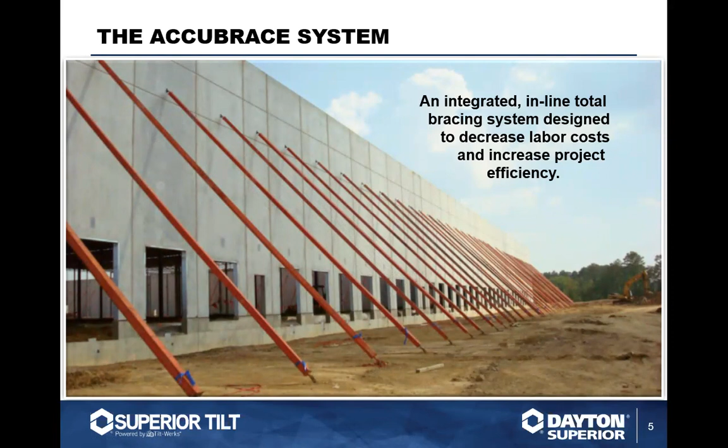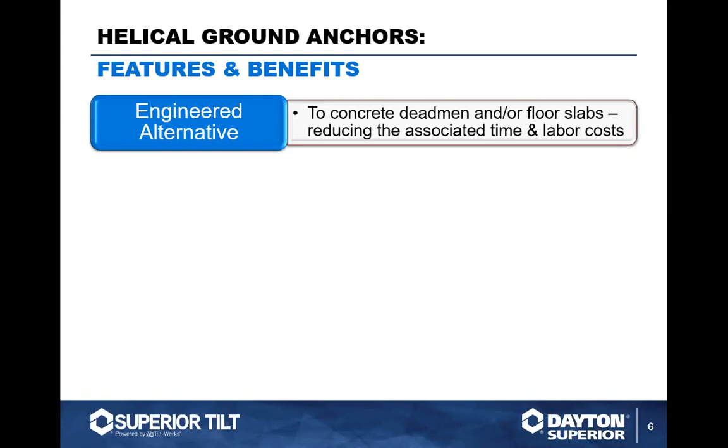Accubrace is an integrated inline total bracing system designed to decrease labor costs and increase project efficiency. Some of the features and benefits of the Accubrace system: it's an engineered alternative to concrete deadmen. If the project is not going to have the slab available to brace to, and you're going to have to use concrete deadmen or strip footers, the HGAs can be used as an alternative to that. And this can reduce costs through eliminating the extra concrete needed for the deadmen or strip footer, and also the labor that goes into that.

It is a rapid all-weather brace installation system. Once the HGA is installed, it can receive immediate loading. There are no pull tests associated with HGAs.

As the installer is installing the HGA, they'll monitor pressure to make sure we receive the adequate torque that is needed for the braces. The only thing weather-wise that could put a damper on HGA installation is up in the north with the heavy frost in the winter. We have run into issues with there being too much frost in the ground for the HGAs.

We are able to remove and relocate the HGAs on site. We all know that projects usually come with revisions. With the HGA system, if you need to move it, you can take it out and reinstall, unlike dead men where you have the concrete in the ground that is there once it's there.

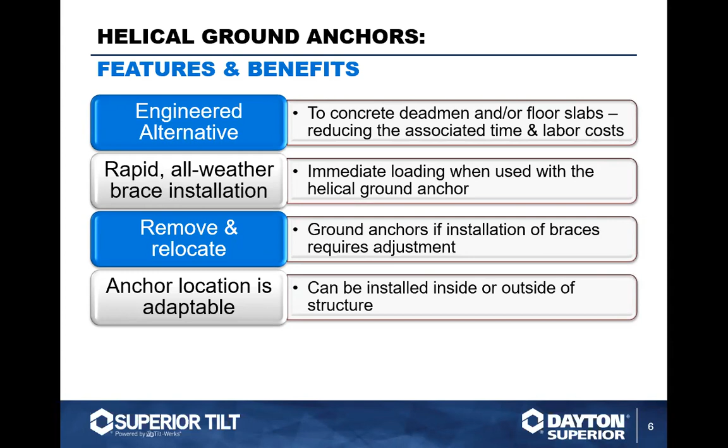The anchor location is also adaptable. These can be installed inside or outside of the structure. We actually have a lot of projects where the whole project might go to the slab for braces, but there's a corner where the slab won't be available. So they'll have us come and install HGAs in place of that.

Also, when you can brace outside to HGAs, it allows the steel erection to go a little smoother, opens things up for those guys, gives them room to work, and the steel won't be impeding on the braces.

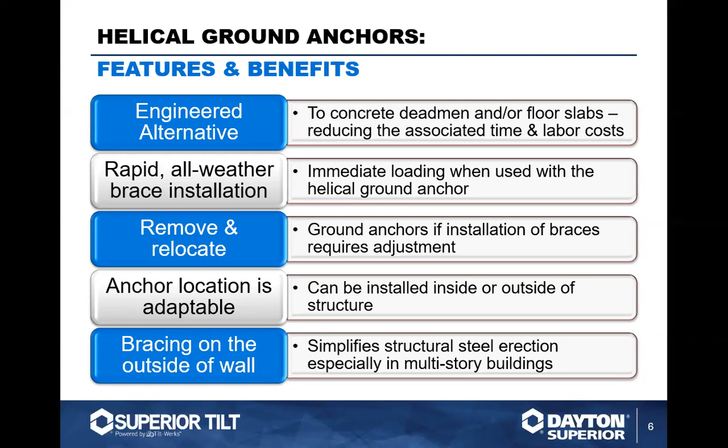Some more features and benefits. We do have the professional engineering team at Dayton, and if the project is in engineering with Dayton Superior, we have it available. We can do the HGA layout right in the engineering package. This will give you an X dimension where the HGA will be located, and the contractor can do the layout for the install.

They're removable and reusable. Once the roof structure is in and the engineer of record signs off on the braces being able to be removed, we'll come out and remove the HGAs. And basically when you're removing them, they refill the hole they created on their own, so there's no cleanup.

The HGA can be used with any type of brace as long as the STBC can be attached to it. It's a 1.5 inch square bar that the STBC accepts, and that is where our HGAs are. In some instances, HGAs can reduce the number of braces needed if they're used with our Accubrace square high capacity braces.

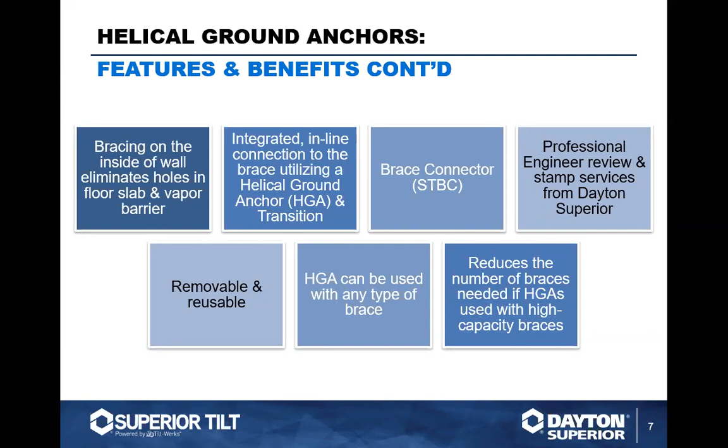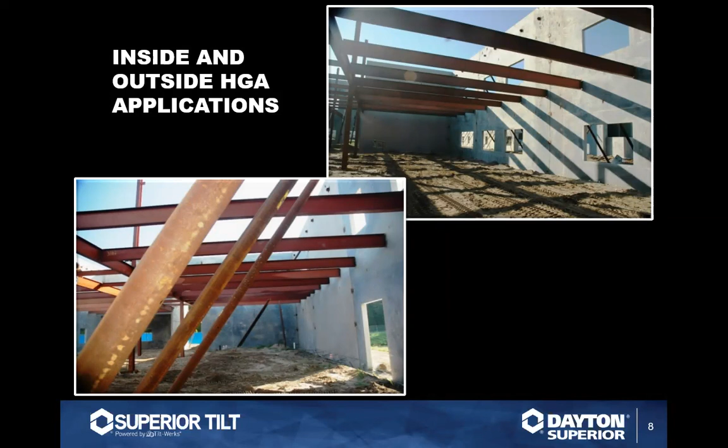So I have a couple examples here of inside and out. You can see in the top right, we were able to do HGAs outside the building to leave room nice and clean for the steel guys to work on their part. And then also we can do inside, as you can see in the bottom picture.

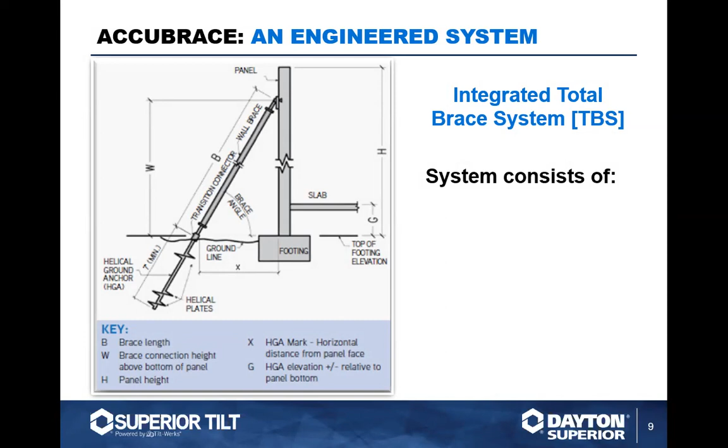We have a diagram of what the Accubrace system looks like. You have your wall brace, your connection, and your HGA. The standard transition brace connector is what's going to be your connection between your HGA and your brace. And you can also see the X dimension is the horizontal distance from the panel face. That's where your contractor is going to mark out the spot for the install.

Typically, the HGA has to match the brace angle within plus or minus 5 degrees. So once that HGA is installed, typically it's around 5 feet in the ground.

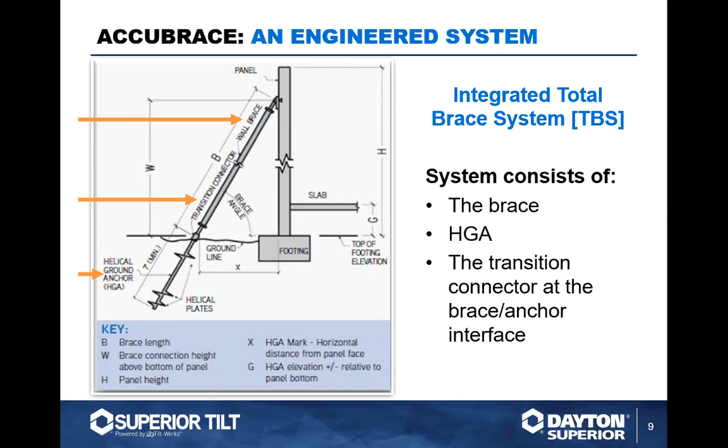As always, if you know you're going to have a project that's going to require HGAs, let us know and get us the soils report, the geotech report. We have engineers that will take a look at that, and they'll take a look at the blow counts and let you know that HGAs would be suitable for that project.

Obviously, the HGAs cannot be installed through solid rock or very dense, highly compacted clay. So we'll take a look at that on the front end and just make sure that HGAs will be suitable and that we believe will reach the appropriate pressure.

The HGA layout and design can be PE stamped by our engineers also.

We're going to take a look at the Accubrace components. You have your helical ground anchor on the left, which is your standard HGA. That has a safe working load of 12,000 pounds. And then you also have an HGA extension.

This would be used if, say, you install the standard HGA and we don't achieve the minimum pressure needed. We can add another 4 feet. It bolts to the top of the standard HGA, and we can install 4 more feet to try to achieve that pressure.

In my experience installing, and I'm sure Brad would say the same thing, typically we don't need to use these. We can typically achieve the needed pressure with just the standard HGA. I can count maybe on one hand the amount of jobs we've needed them.

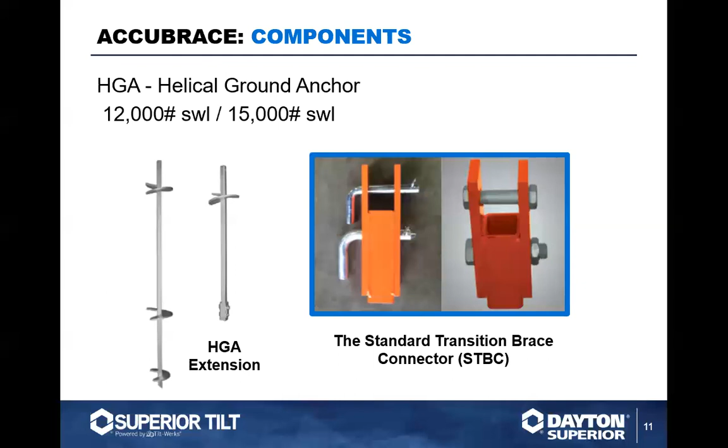And on the right, you have your standard transition brace connector. This is going to be your connection between the HGA and the brace once the HGA is installed. We typically ship them out with 3/4 and 5/8 grade 8 L pins, but upon request, we can provide bolts. We've had some contractors that just get a little bit better feeling having bolts instead of pins. So that is an option.

If you're on a job site and see an HGA that is not all the way in the ground, with more than 6 inches sticking up, that is incorrectly installed. That top flight needs to be completely in the ground for horizontal stability.

We have the transition brace connector again. As you can see, it is an inline system. The HGA needs to match the brace angle on the panel book. You do have 5 degrees plus or minus leeway, but it needs to be installed at that angle to achieve the inline system. There's a couple of different examples of different STBCs there.

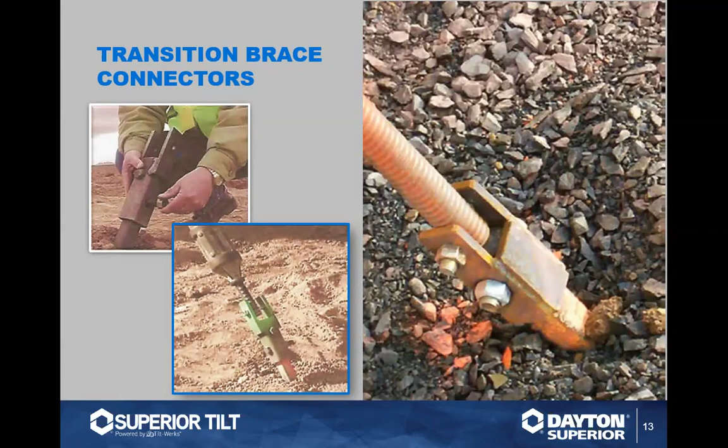Installation. Typically, if you have a project that is going to require HGAs and you are also renting the braces from us, when we put the order in, we will let the warehouse know that this is going to HGAs, and we will already have the STBC installed on the brace so that you don't have to take the wall plate off on site and connect it, because the wall plate to HGA connection is not an approved Dayton Superior connection.

As I stated earlier, the STBC will attach to the brace using the 5/8 grade 8 L pin with locking cotter pin, and the connection to the HGA will be a 3/4 inch grade 8 L pin with a locking cotter pin.

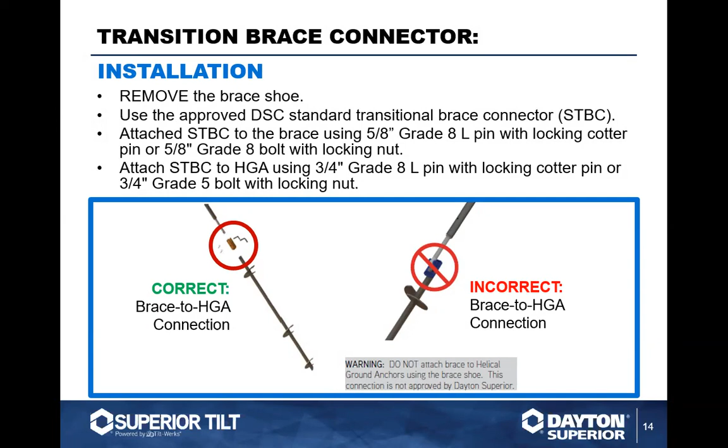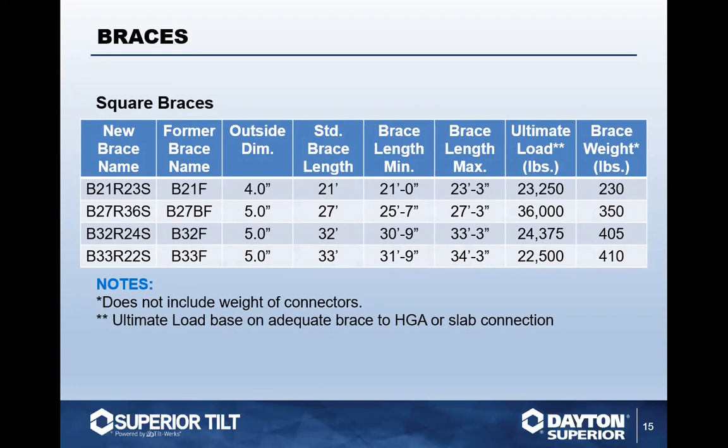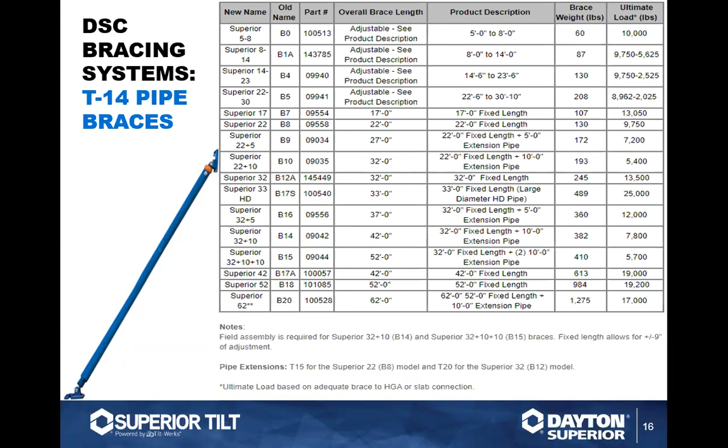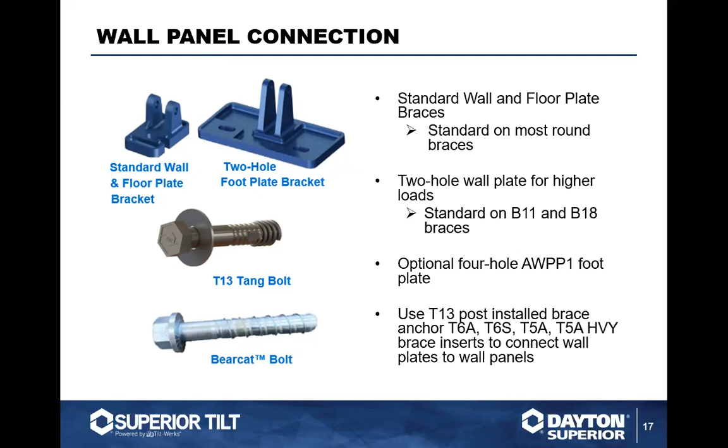We also carry our T5A heavy and T6A wall brace inserts. They come with a locator plug. We also have the inverted for outside bracing. And these are, like I said, they come with a locator plug, and they can be used with our B14 coil bolt to hook the brace to the wall.

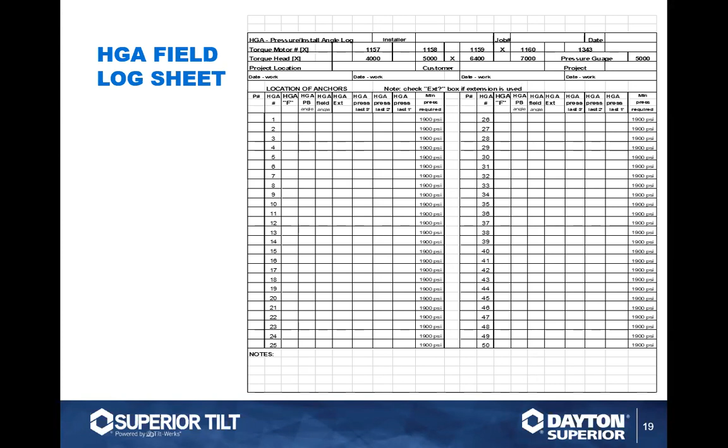So a lot of times with the braces that we have, we already know what our minimum PSI is going to be for each anchor going into each job. Sometimes we do have to reach out to an engineer for special projects, if you will. So these can be obtained anytime you have a job. You could reach out to our Superior Tilt or to me to obtain a copy of our pressure sheets. We're starting to get a lot more requests for that. All right, Heidi, if we could switch.

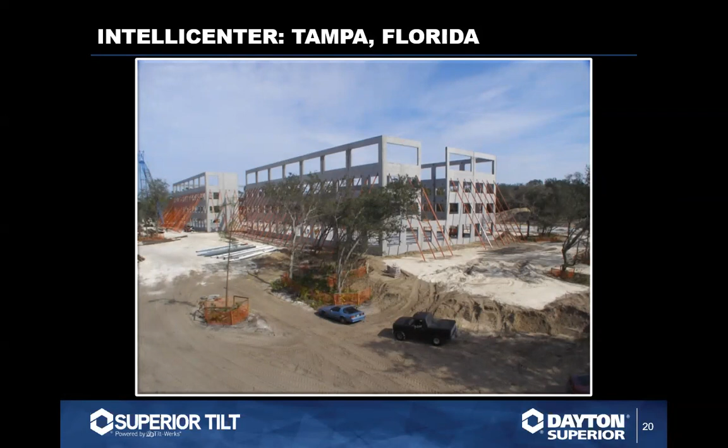So I'm going to be running through this kind of quick. We just have some photos and different things I want to explain. This was Intellicenter in Tampa, Florida. We did it a few years ago. As you can see in this picture, these are very tall panels. We used our square braces that have the high capacity, and that's where these braces would come into effect. Go ahead, Heidi, switch to the next one.

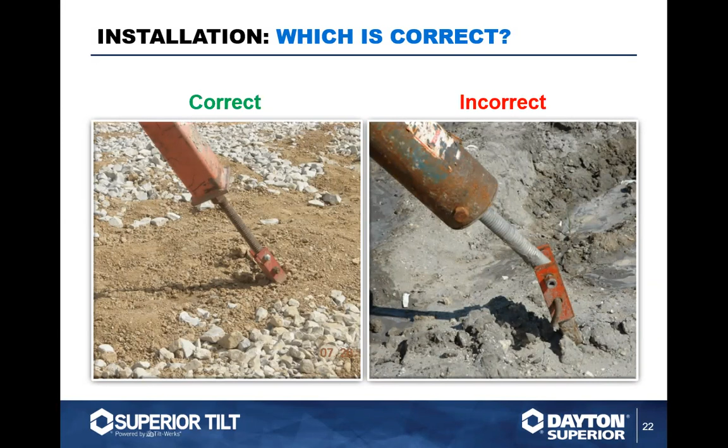So obviously we want to make sure that that load is in line through the whole brace, through the anchor, into the ground, where the HGA has that cone of influence for pressure. We can go with the next slide, Heidi.

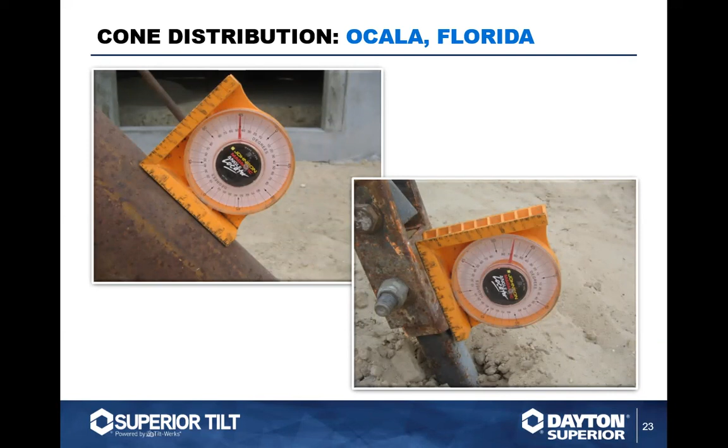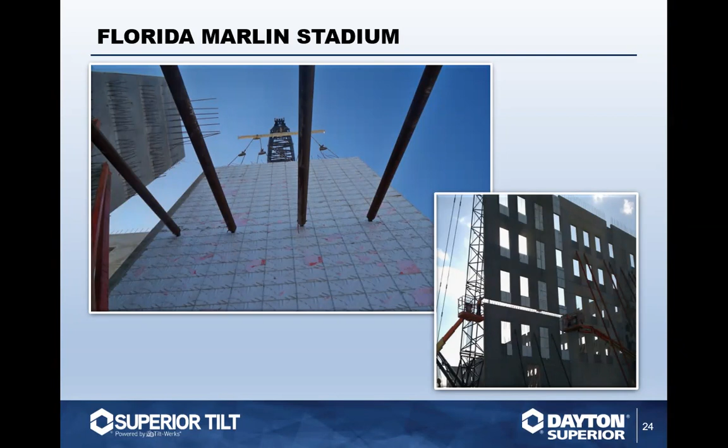Go ahead, Heidi. This was a big project for us a few years back, Florida Marlins Stadium. This just goes to show, like your picture on the right there, they're double stacking panels. So on the picture on the right, you could see where we've used shorter braces to brace that first panel, the bottom panel, and then you could see where we use maybe the taller square brace to brace that top panel. This was a pretty unique project for us.

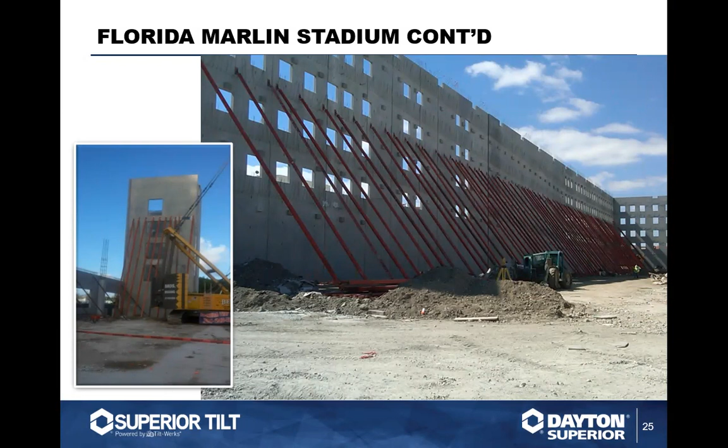Huh? Yeah. Let's go to California next. Yep.

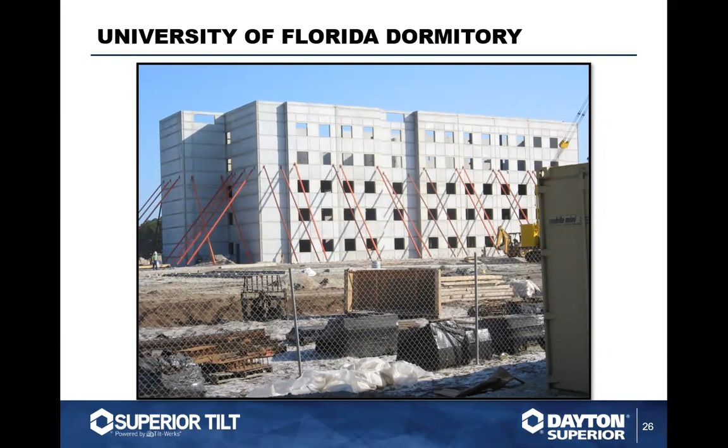Yeah, I mean, 1, 2, 3, 4, 5. It's a 5-story building basically. So just wanted to show our high capacity braces with the very tall panels. And as we go further into construction, the industry, we're learning that a lot of contractors, they're in tight spaces, so they want to go higher, not wider. So that's what developed our 62-foot brace with these data centers.

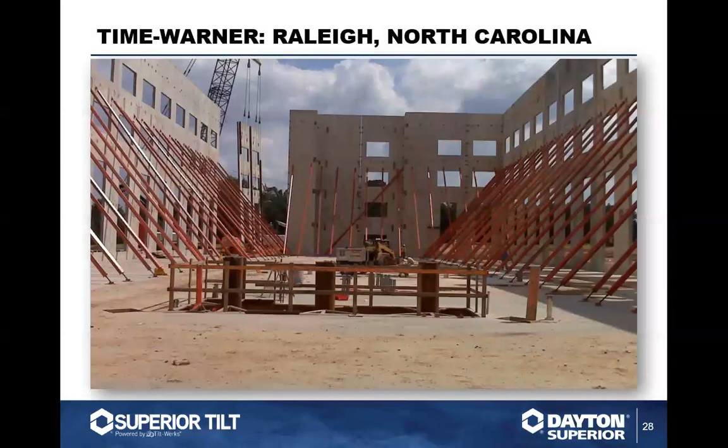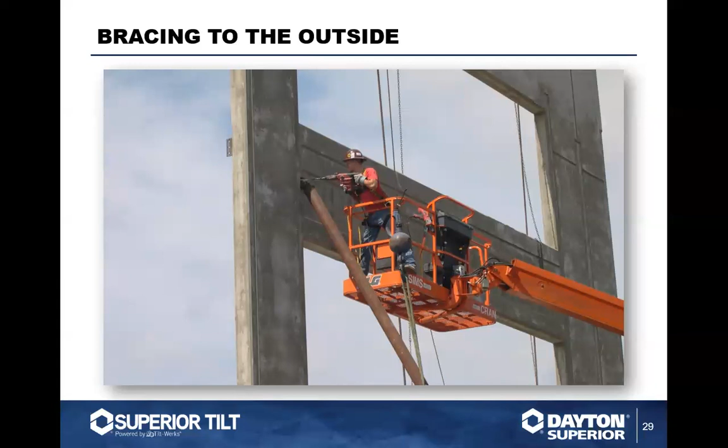All right, Heidi, I'll go to the next one. Here's just a picture of a guy. We're bracing to the outside here. So this looks like it's a solid panel, which is very universal for contractors. They don't have, say, a 3x6 or 2x4 solid insert they need to hit. They can kind of move that brace around a little bit to satisfy what they're doing. We'll go to the next one.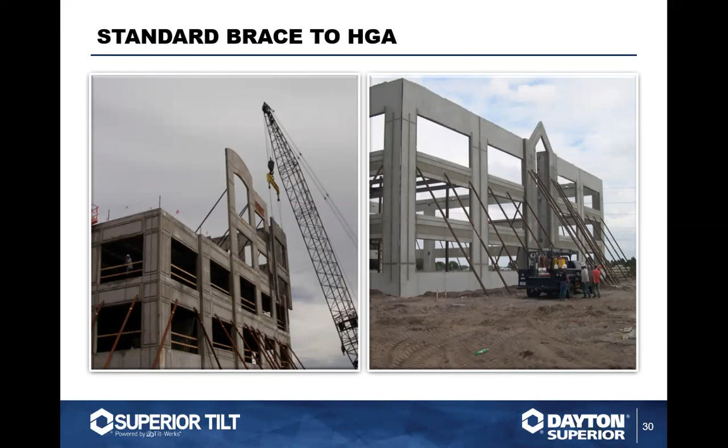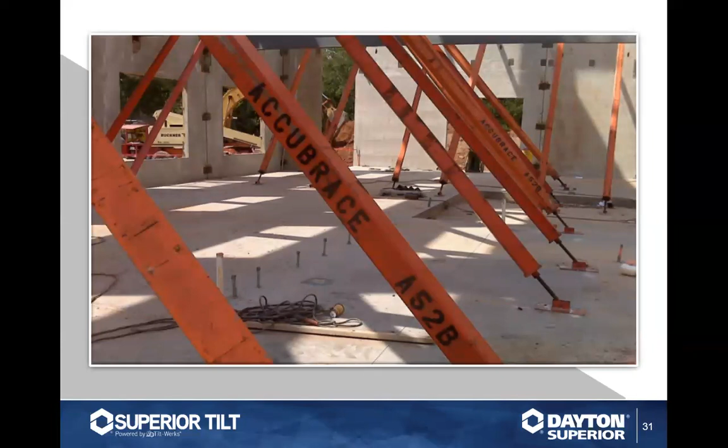Again, different style panels. As you can see, we're bracing to the outside, but on the picture on the left, we're bracing on the inside to a slab floor that's already been poured in this parking garage. So, you know, we can do different levels. You can use the braces in various different ways. Once the structure is erected, obviously there has to be a plan to get these braces down and out of these buildings.

Okay, Heidi. Here's a better picture of the AWPP1 wall plate. I just want to let everybody know that we actually do not have this A52B brace available anymore. But basically, we have this picture in here to show the AWPP1 being attached to the floor slab. We'll go to picture 32.

Here's a picture with HGAs, like Tyler talked earlier. This is on the outside of the building where maybe something was going on the inside and we needed to alleviate room for other trades to do their jobs. So we were able to put HGAs on the outside of the building to accommodate this contractor.

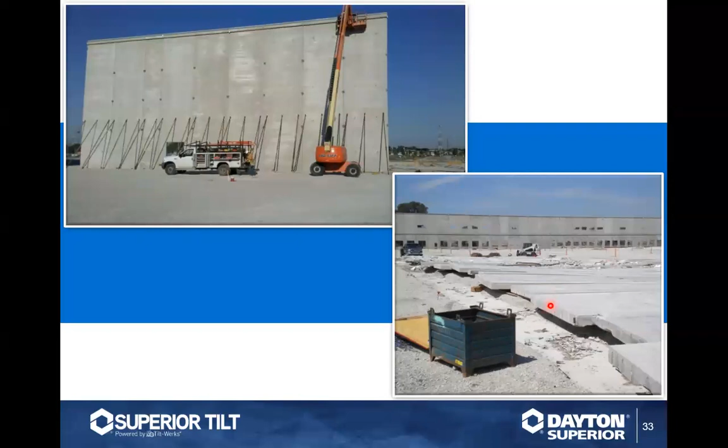And another picture where we can do inside, outside bracing. Hindsight, maybe we should have, or the engineer maybe should have braced this to the outside to get the braces out of the steel. Could have alleviated a lot of problems. But we do have that option.

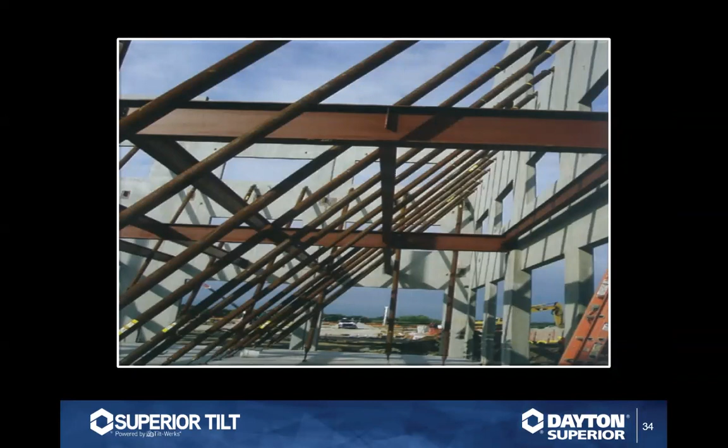Thank you, Brad. So we actually have a couple of questions. Oh, I'm sorry, did I cut you off? Go ahead, go ahead, I didn't mean to cut you off. No, I was just going to tell you, I was going to turn it over to you.

Okay, awesome, so a couple questions. I think one we're going to have to get with the engineers on: could you show a sample of the HGA plan in a Dayton provided engineering package? And we can't do that, I don't have one right now, right here with us. We could probably get you with an engineer. Yeah, so if they can give us their contact information, we can have engineering reach out to them and get them exactly what they're looking for. Okay, Mr. Griffith, I'll go ahead and get you connected with the right person on that, okay?

Then another question is, when using the 4-foot extension, should the whole extension go in the ground, or is partially enough? It must be all the way installed. Same thing, yep, correct. Well, I'm glad you guys had the same answer. Yep, the extension is just another part of the HGA, so when that extension is fully installed, it should be fully installed.

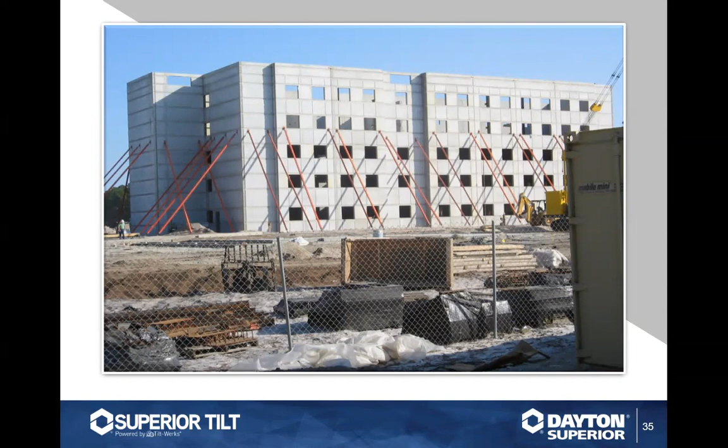Okay, and if anybody else has any questions, go ahead and do it in the chat or the question and answer area. I'm going to go ahead with the resources here real quick. So what are your resources? We obviously had a product page on daytonsuperior.com that has the Accubrace system as well as the HGAs that we have gone over.

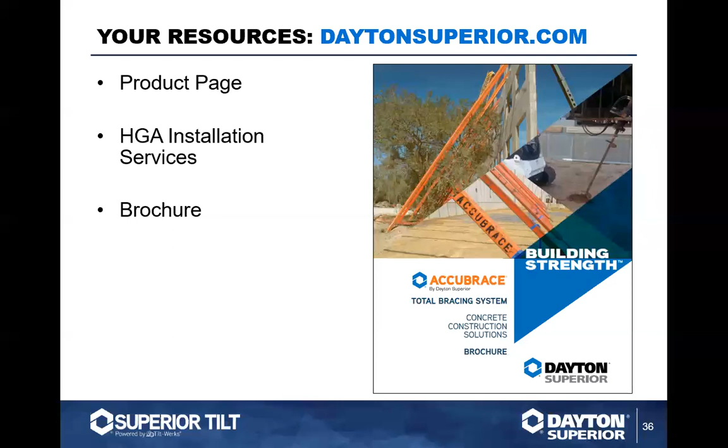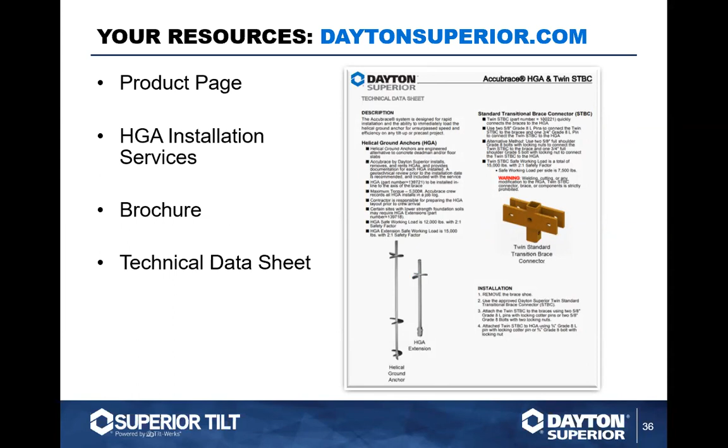There's an installation service sheet that is out there, it looks like this that you're seeing on your screen. In addition, we have a great brochure that shows you all of the concrete construction solutions around Accubrace and the system, as well as a technical data sheet. This is only the first page of it, but I wanted to give you a preview of it. All of this, again, can be found on DaytonSuperior.com.